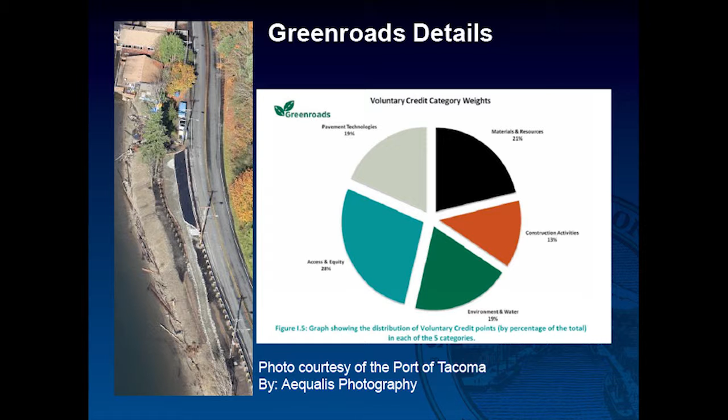There's a lot of misconception that Greenroads is actually green infrastructure. I'm not going to lie, that's how I got into it. But as you can see by this little pie chart, the green one is the environment and water section, and only about 10% of that 19% is stormwater related. So it really looks at the whole carbon footprint of your road and how you construct your facilities.

So what are the benefits that we've seen in Tacoma? One is that we have a number of high-level planning documents that we're supposed to use to design our roads, and this helps to put it all down into a simple checklist that actually speaks engineer. It also inspires interdepartmental communication and results in more efficient projects. And as you can see by this picture, it also provides a higher level of recognition for your projects. This is my director throwing the opening pitch for the Rainiers game.

So we have 4 green roads that also have green infrastructure throughout them, and I will be going into a little bit more detail on all these projects. Our first project, the Cheney Stadium Sustainable Stormwater Project, was a 2-phase project. The first phase was Clay Huntington Way, which is up to your left there off of 19th Street. It was our first installation of pervious asphalt roadway. All of the areas in blue are pervious asphalt.

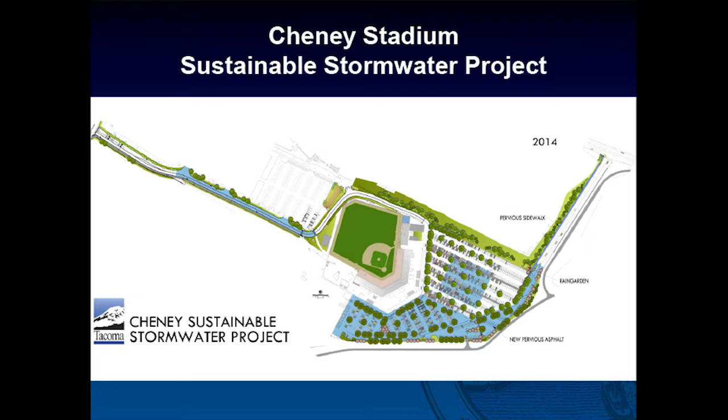For the second phase, we received a grant from the Department of Ecology, which is this larger section here down at the bottom. Okay, sorry. We manage about 11 acres within only 4 acres of pervious asphalt. Phase 1 has been installed for 3 winters now, and it's exceeding all expectations as far as the modeling that we've shown.

It's only actually overflowed at one point in time when we had a really large storm event, but that middle area right there has about 5 acres that all contribute to it, and it was modeled to infiltrate only at 85%. I'd like to also point out that this approach, particularly in Clay Huntington Way, the roadway, was about half the cost of traditional improvements. But that didn't come without some very valuable lessons that we've learned.

As I said, this was our first project, and so we used the LID manual as guidance, and ultimately our contractor did just about everything that you're not supposed to do in the LID manual. They excavated the whole road down to native subgrade. They used it as their haul road. They put their stockpiles on top of it. They wanted to use the rain garden as erosion control. And plus we were doing it in the wintertime because of baseball season, the only time available to do that.

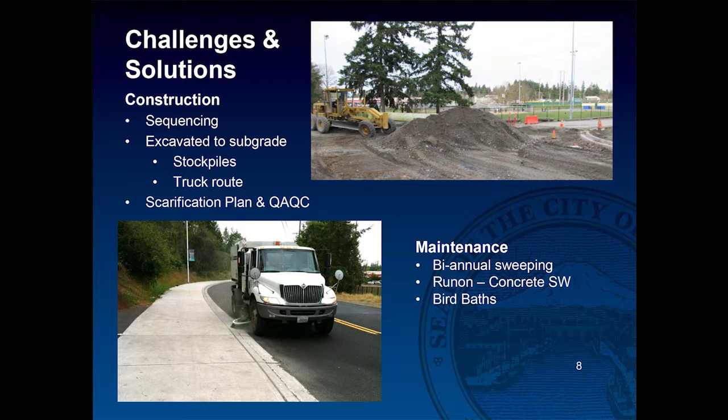It was primarily because of the run-on from the sidewalk here, and that first summer, when the concrete cures, the little fine particles that come off of it plugged it up pretty quickly. So if you have an area with run-on, it's not necessarily a done deal, but you definitely have to maintain it up front a little more heavily than other areas.

The second phase of our project, we ran across some issues with the permeable ballast. WashDOT actually got involved in this project, and when we were out there inspecting it, they came out and looked at it, and they asked me the question, how are you testing this rock to make sure that as it's exposed to water for the life of it, that it's not going to degrade? And I was like, well, we used the LID manual that said to use your permeable ballast spec.

And they said, well, the testing that we do on that rock and the requirements that we have does not have anything to do with how water is exposed to the rock, because we don't expose our subgrade or our base material. So we went back and looked at it a little further. We also had an ASA cert on this project for this rock, but the rock was degrading actually as it was being placed. So we actually had to remove it all.

And in the future, we will be testing the rock at the pit before it comes on site. And we also are changing the specifications to increase the LA abrasion and degradation testing requirements above what WashDOT spec is.

Our Alaska Street project is an arterial that has pervious concrete in the parking lanes and some of the sidewalks. This project was a little bit different in that we extended the permeable ballast underneath the sidewalk and put in standard concrete on top of the ballast. And the ballast extends 2 feet past the sidewalk to catch that run-on from the residential properties. That was a recommendation from our geotech to minimize the impact on the residents.

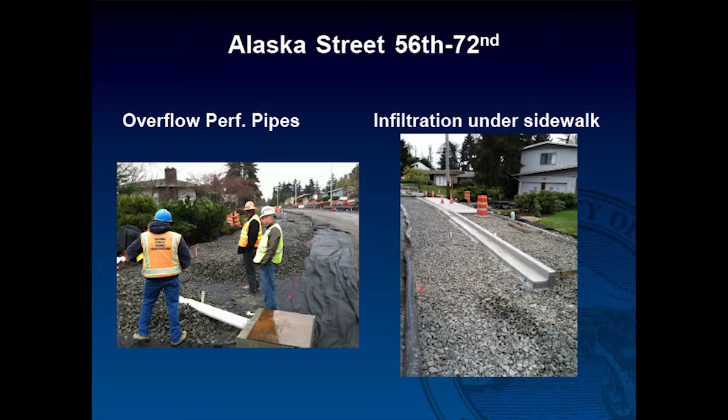It looks exactly like standard concrete. Well, it is standard concrete. Looks just like every other street, but it has a pretty big impact on stormwater. It also doesn't get into the question of, does the sidewalk then become a stormwater asset rather than maintained by the residents? So that's another reason why we went with this route.

We had one area of the road that had a steeper section. It was about 7%, and our roadway engineers went really out on a limb to allow us to put this in the parking area. But they were not excited about the check dams. They were very, very worried about those. So instead, we installed overflow pipes, perforated pipes that were tipped up, and those have been working very well. Oh, wrong way.

So we have had our issues with this project. One of them is that when standard HMA is first placed, those first 2 or 3 years in the summertime, there's fine particles that come off of the asphalt, and it goes normally into our storm sewer system. It doesn't get treated, but conveniently we had pervious concrete here that plugged it up pretty quickly.

We got a call from Bellingham. They've had similar situations with this, but after about 3 years, that has subsided, and now they don't have that issue as much anymore. So we're watching that. We're sweeping it more frequently than we normally would, but we expect that to dissipate. We're also looking at potentially a retrofit for this.

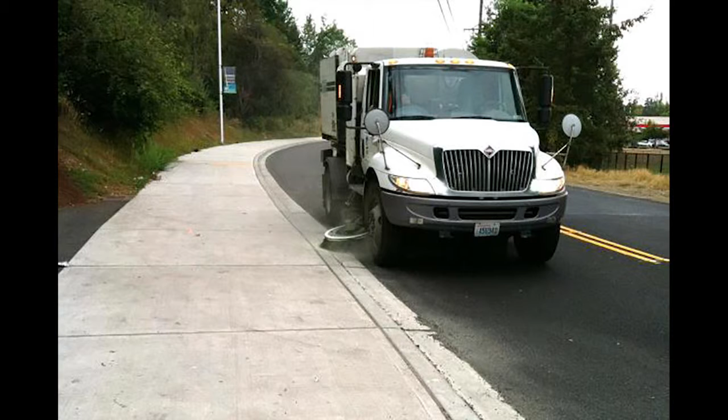Another issue is that we designed this with the standard turning radius for our sweeper trucks, but the sweeper truck radius is really for the whole sweeper and the brushes that go out and around, and the vacuum part is only under the wheel wells. So those corners never actually get vacuumed. So definitely something to consider if you're looking at putting it in a parking lane.

We also learned that gutters are a bad thing, and they convey all the stormwater from the driveways just like they're supposed to, and they pop it out right where you turn the gutter from lip up to lip down, and that's where your plume of sediment is going to go. So we aren't going to be putting gutters in our future projects.

And if we do have to put a gutter in, we'll be putting in these overflow infiltration galleries to help have that sediment go and collect in those areas where we want, and we can maintain them easier and preserve the function of the road.

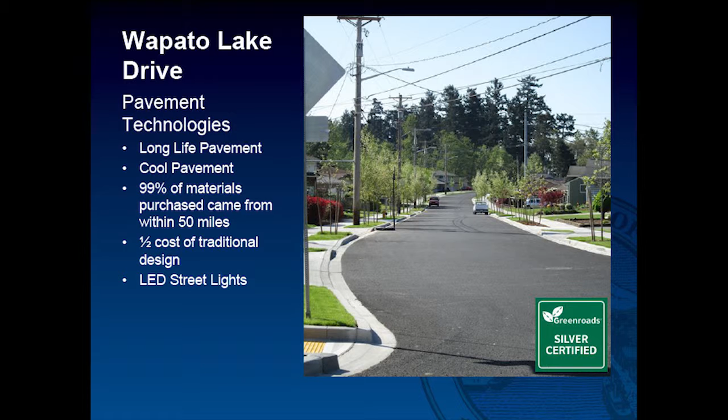Wapato Lake Drive was one of our first public pervious asphalt roadways. This was a grant from the Department of Ecology. It was the full roadway, 1,300 lineal feet. We designed this to a 40-year design life with a thicker cross-section. And this was also half the cost of the traditional design approach.

This was a 1,300 lineal foot road, and it had 2 catch basins right in the middle. Guess where the road failed? Right in the middle, right? So we did not extend storm to have a catch basin every 350 feet. We left it as it was with the catch basins in the middle for the emergency overflow.

This again, back to the curb and gutter. I want to hammer this home a little bit more. There's not a whole lot of information that I have found about curb and gutter as it relates to designing pervious roads. But on every single project that we have, this has been a real issue with my contractor, construction management, and our inspectors. They are very worried about putting curb on top of permeable ballast and what that will look like, if they're going to get compaction underneath of it.

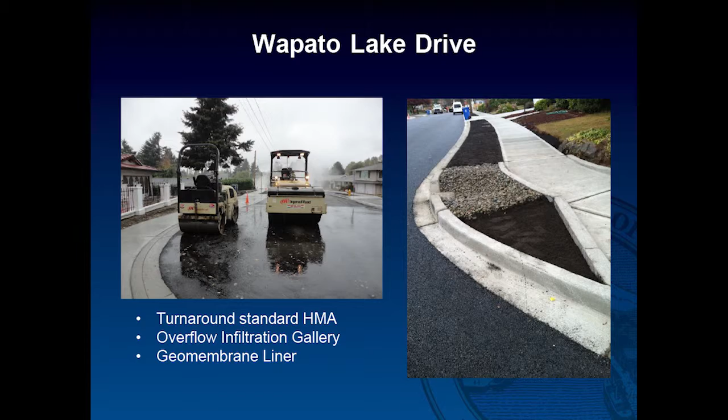So really think about what it is that you're going to be putting that curb and gutter on. If you talk to experienced contractors, it's not a big deal. But if they haven't done it before, you're definitely going to have to stick to your guns on that one. A couple other key features on this: the turnaround at the end of the street was a little substandard. It was right next to a lake and a wetland, so we had to work closely with our traffic department to get it reduced. And we did that with standard HMA.

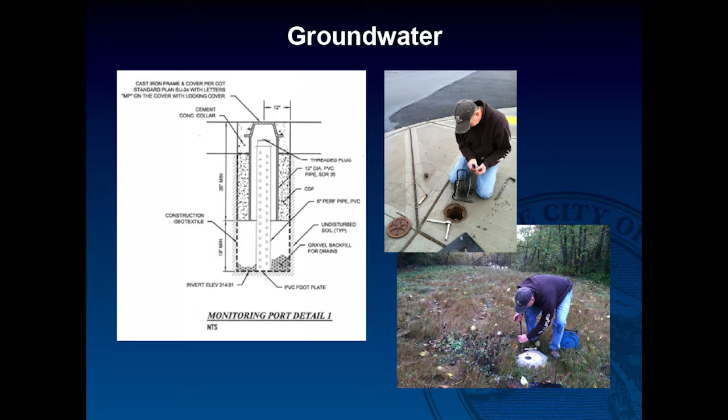Groundwater, of course, is a very important consideration for your pervious projects. We had 3 groundwater monitoring wells for both of these projects. In addition to that, we put in a monitoring port within the pavement itself, so you can see if there's any ponding within that area. This was really helpful when we had the wettest season on record last year, and our residents complained that my pervious road was flooding out their backyards. We were able to take them right out in front of the street and show that there was no water actually in the roadway.

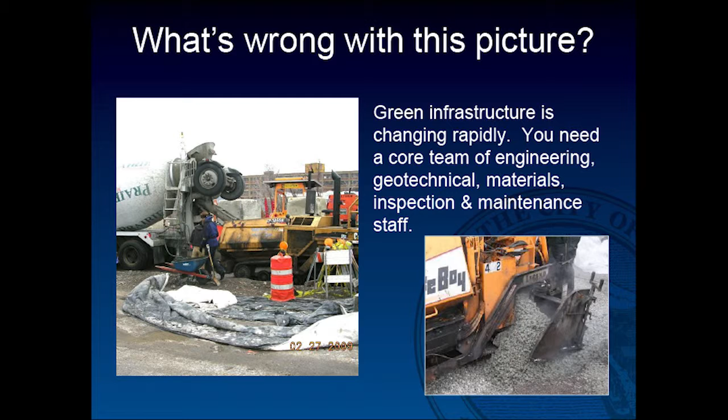So what is wrong with this picture? Anybody? This is actually from 2009, where the city of Chicago installed one of their first applications of pervious concrete with an asphalt paving machine. So it just goes to show that this industry is changing at a pretty rapid rate, and you really need to have a core team of civil engineering, geotechnical, materials engineers, and your inspection and maintenance staff to have these be successful in your city.

Green infrastructure has been demonstrated to be a very cost-effective strategy for managing stormwater and rebuilding our roads. It requires a hands-on approach with a knowledgeable team. And of course, we definitely need industry standards. That's where Tim is going to explain our regional group that's been working on these specifications.

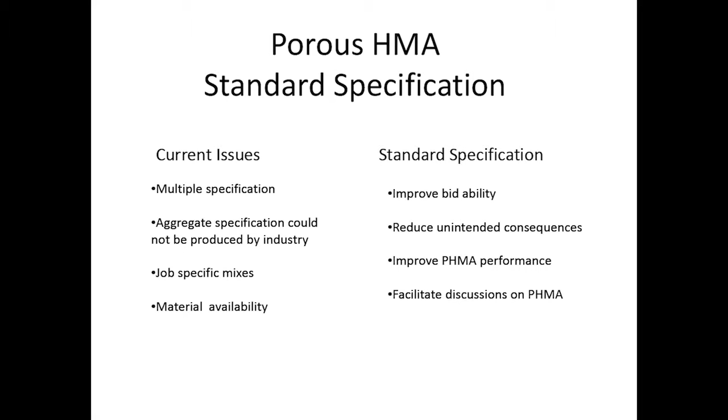Thank you. So, as Jessica said, we're working towards some standard specifications, and that's what I'm here to talk about. This developed out of both Mark and Jessica's work and through industry as well. Each city and county was putting out their own set of specifications. While no specification was necessarily wrong, industry would get a pervious paving contract, but the city of Tacoma would be different from the city of Puyallup, which would be different from King County. So much like WSDOT has done with traditional HMA, if we can get the same aggregates together, they can make it in larger quantities and reduce cost.

There are some other issues with those job mixes that were coming out. Some of them only certain plants could produce. So our goal with this particular specification is to make something that can be used in Washington over and over again. As for the standard specification, our goal is to improve the bidability, so each contract can be bid by multiple contractors. We want to reduce unintended consequences. For example, one mix design allowed 0 fines.

For the pavement itself that isn't an issue, but as industry tried to create that, those fines helped cool their equipment. When there were no fines in the mix, their equipment would overheat and they weren't able to produce the asphalt at the ideal temperature for laydown, which then would impact the durability.

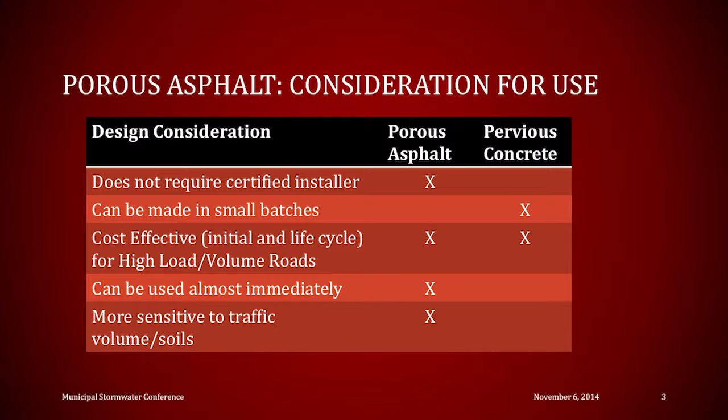Porous asphalt does have the advantage of being able to be used almost immediately, and I bring that point up because we are preparing to do 39th Avenue Southwest in the city of Puyallup as a pervious concrete road. And 39th Avenue Southwest, if you're familiar with it, is a busy arterial. It's where our Costco is located, and you're all probably familiar with the traffic that a Costco generates.

So it's really not an option for us to close down that main arterial for 7 days while that concrete cures. So we're looking at different alternatives there. Asphalt would be a possible solution. But again, then you get to the next point. Porous asphalt is going to be much more sensitive to soil conditions when you're talking about flexible pavement design and the high volumes that are on arterial roads.

If you start looking at what WSDOT recommends for a pavement section for porous asphalt on arterials, the roadway section will get pretty thick, and that can get you into conflicts with your existing utilities in the road, and the excavation costs can start making that less cost effective. So on a life cycle cost and even an initial cost, pervious concrete tends to get the advantage on arterial roads, which is why the city of Puyallup will be looking at pervious concrete on the 3 arterial projects we've got going instead of porous asphalt.

Just kind of looking, if you're using porous asphalt, I'm going to jump around. This is a lot of design and lessons learned stuff on other projects. If you are using a choker course, and I know we should get into some of that discussion in the question and answer period on alternatives to choker courses for porous asphalt. Porous asphalt, you need to have a choker course only because you're trying to get a working surface for your paving machines out there. You don't want to be trying to work on that large diameter aggregate out there. That's rough to work on.

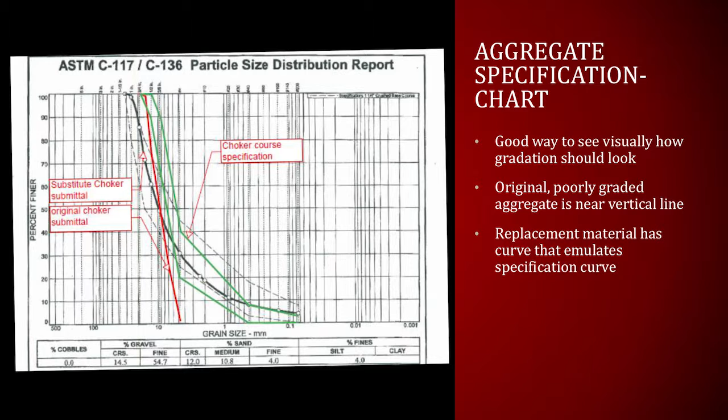The substitute one was slightly larger aggregate in size, but it did follow the shape of the curve fairly effectively. In the lower end, it was within the specification, and it was well graded enough that it actually bound up and was a good supporting surface for the paving machines.

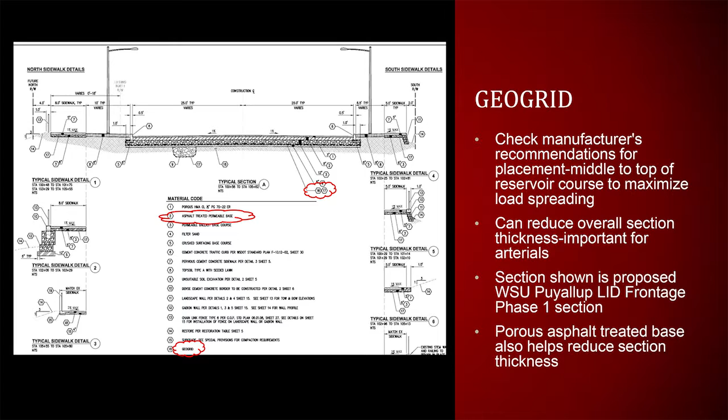Mentioned that porous asphalt. This is one thing. What you're looking at here is a cross section for our WSU Phase 1 LID project, which we're hopefully applying for. There's probably DOE grant managers out here, but we're applying for a DOE grant tomorrow on this. This particular one is an arterial, but we are going to be going porous asphalt on this project. The reason is because we've got about a 4 or 5 foot layer of peat underneath, about 10 to 15 feet down, and we don't want to be putting a rigid pavement on top of this very flexible and differentially moving soil. So we're going to be putting porous asphalt on here.

But again, we talked about section thickness. If we're going to have a lot of traffic, poor soil conditions, and a flexible pavement design, that could create a pavement section that could be 2, 2.5, even 3 feet thick. So one of the things we're going to be doing is putting a geogrid layer in here, probably in the upper 2/3 of the reservoir course, in order to spread that loading out and help us thin down the section.

We're also going to use that innovative surface for putting the asphalt paving machines on. Jessica usually uses the porous asphalt treated base instead of a choker course, so the paving machines could work on it, but it also will add some structural strength to the porous pavement section as well. So those are a couple things you can take into consideration when you get into poor soil conditions and you need to use porous asphalt. You can't use a pervious concrete on an arterial type road.

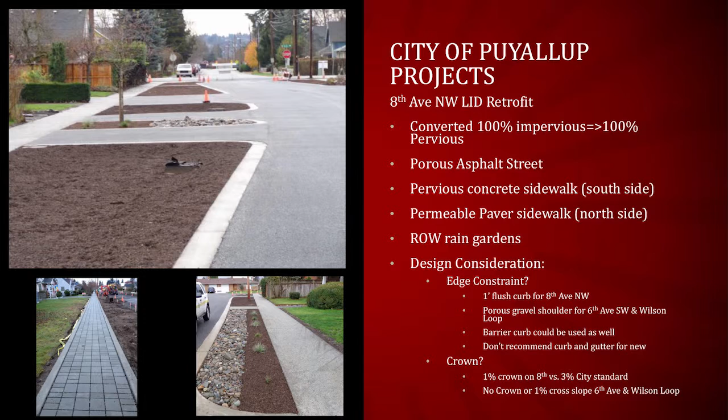This is a picture of the 8th Avenue project. Jessica already touched on this, so I won't hit on it too hard, but do you need to have edge constraints? That's a question we did ask ourselves when we were designing it. At the point we did this one, we felt we did, but we used a flush curb. It's an 18-inch deep, 12-inch wide flush curb in this particular case, and that's worked well with the 8th Avenue project. If you do use curbing, I would recommend, as Jessica said, not to use a curb and gutter. Use a vertical barrier curb instead and just pave up to that.

One of the other things we wanted to look at: do you need crowns? Typically the crown for roads in the city of Puyallup is 3%. We obviously felt we didn't need that, but we wanted to have some backup in case there was any clogging or any failure of the pavement. So there's a 1% crown on this road that will drain off into the rain gardens adjacent to the roadway section if there should be some failure. So keep that into consideration.

When you're doing your designs, if you're doing parking lots or large flat areas, keep in mind you have that freedom of actually grading your site flat. You don't have to put all the 0.5% dips and breaks that take you hours and hours to design on a parking lot project. If you have porous pavement, you can flatten that out quite a bit, but you probably should have some grade so that it drains positively somewhere. Wilson Loop, so again, we wanted to, thank you.

We wanted to take into consideration whether we need to have that edge restraint or not. So on Wilson Loop and 6th Avenue Southwest, both of those projects, we actually just used our porous shoulder rock on that and butted that up against the pavement. And in both those neighborhoods, the neighbors are driving across that edge. They're on it parking all the time, and we've seen no degradation to the edge on that.

But again, we do have a good firm mix of rock, if I can get to that. Basically, we're doing an in-house mix of that. It's a number 57 rock being mixed with regular crushed surface base course washed out specification. Between the two, we get a good mix of voids on that, but it's also got enough fines that it really packs down and is resistant to rutting. So that's worked out really well for us on some of our applications within the city for porous shoulder applications.

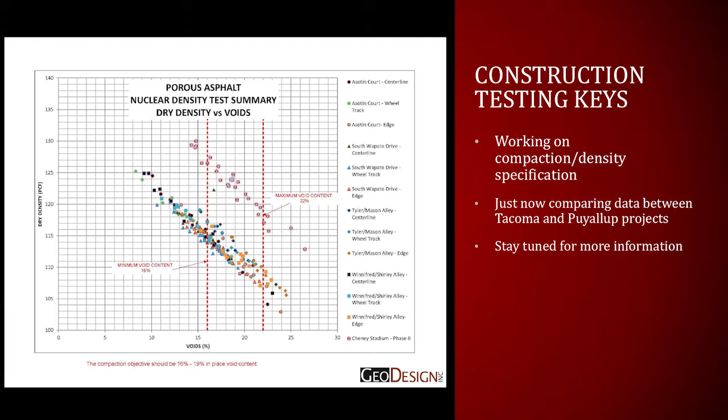Did the similar thing on the city of Puyallup. Then I decided to, since we had some other data, and I haven't thought this through, so if there's some big flaws in this reasoning, just jump out and grab me, because at 10 o'clock last night, I said, aha.

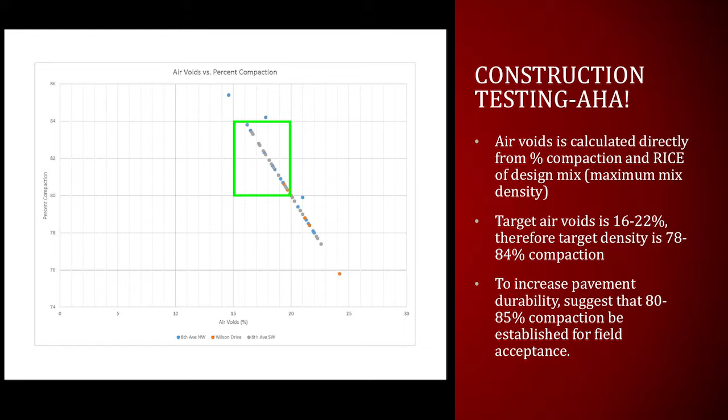Air voids versus percentage compaction, that's a direct calculation. To get your percent compaction, it's a matter of how much voids there are. Since our specification is saying we want to get to between 16 and 22% voids in our finished product, that kind of infers we need to be in the 78 to 84% range of compaction on our pavement. So once you go out to the field and you know what your RICE is or your maximum density of your design mix, you can calculate what density range you should be in for your project.

You should be able to have your inspectors go out there and follow them with a nuclear densometer, get those specifications and know if you're in range for your compaction, and have them continue to hit it with the vibratory compactor until you get to that 80 to 85% range. Again, that's that balance, and I would tend to err towards the 85 range myself, because we want to keep that pavement durable, and I don't think we're going to have too much problem with the leaking. It's going to leak like it should in that void range.

I think we have more of an issue if we are getting in the higher end of that range and having less compaction. We're going to have more raveling and more durability issues with the porous pavement. The more we can treat this like a conventional HMA pavement, the better off we're going to be.

And just a couple notes that have been going to question and answers. So in post-construction, you need to make sure you have regulations out there to make sure that the porous pavement stays in place. This is a formerly porous asphalt driveway in Puyallup where the third or fourth owner after it was completed decided that the salesman telling him about seal coating had a wonderful idea, and he seal coated this driveway. So it's no longer porous, unfortunately. It was working very well.